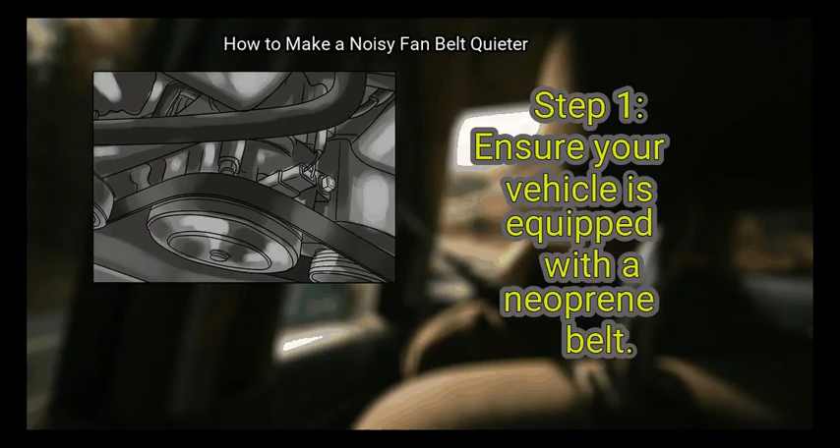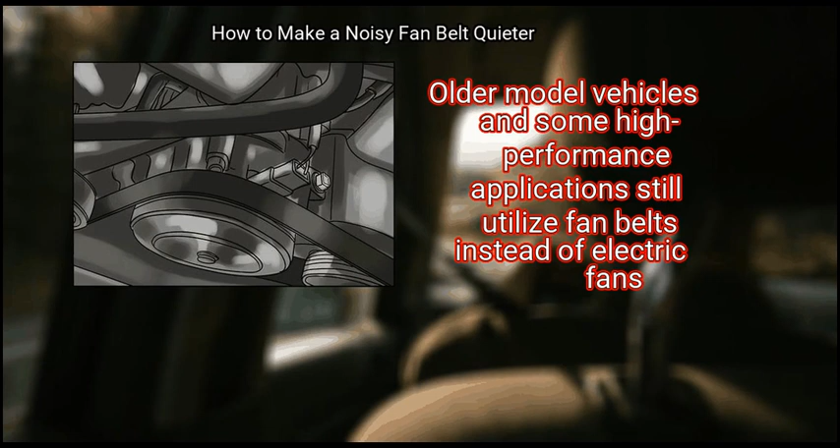Method 1. Applying belt dressing to neoprene belts. First, ensure your vehicle is equipped with a neoprene belt. Most modern vehicles have a serpentine belt instead of a fan belt. Though the names may be used interchangeably, older model vehicles and some high-performance applications still utilize fan belts instead of electric fans. Older belts were made of neoprene and would benefit from the application of belt dressing.

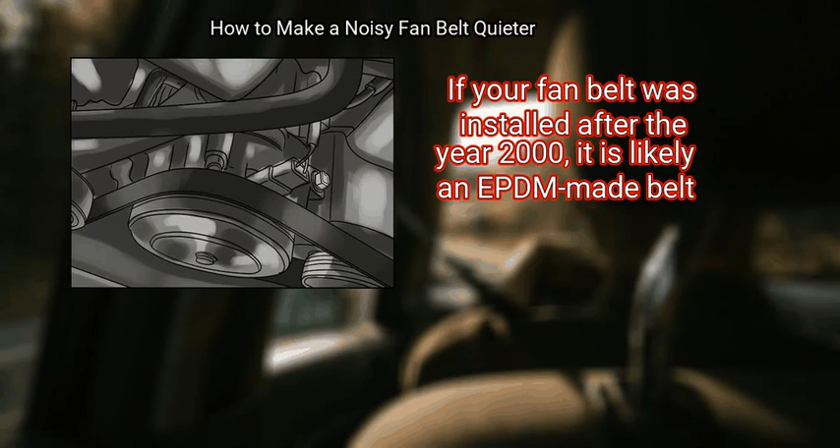But newer EPDM-made belts may dry out as a result of using belt dressing. If your fan belt was installed after the year 2000, it is likely an EPDM-made belt. The two belts are difficult to tell apart visually until they are worn out and need to be replaced.

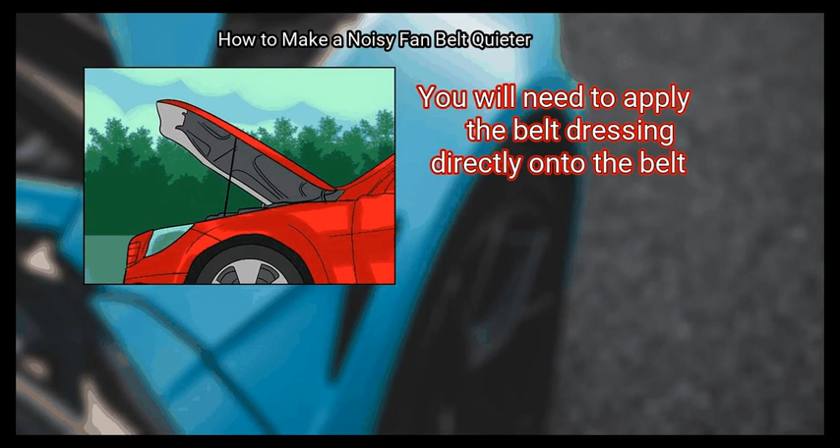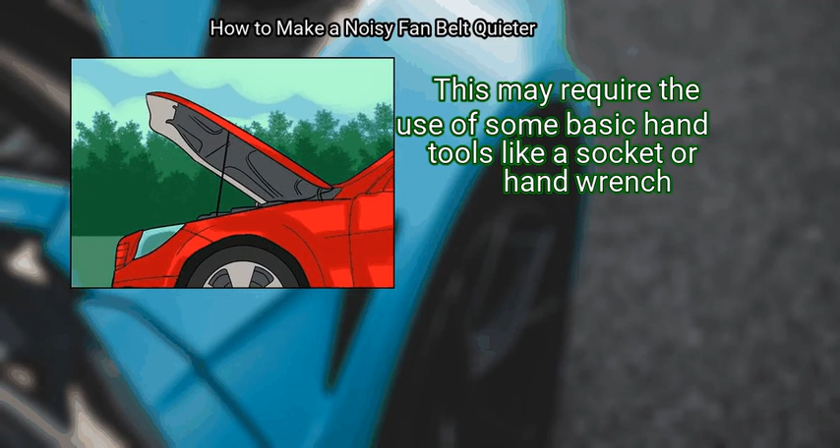Step 2. Open the hood. You will need to apply the belt dressing directly onto the belt. In order to do so, you will need to open the hood of the vehicle and remove any cowl cover that may be in place over the fan belt itself. This may require the use of some basic hand tools like a socket or hand wrench. Some vehicles have engine covers that will need to be removed. You will need a direct line of sight and access to the belt while the engine is running.

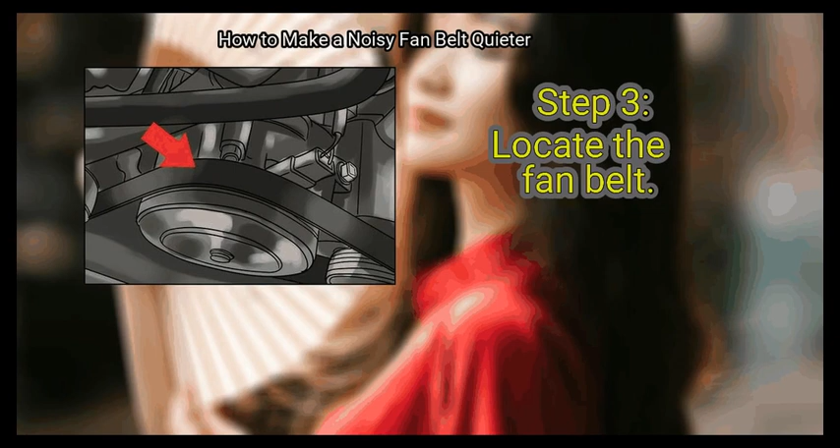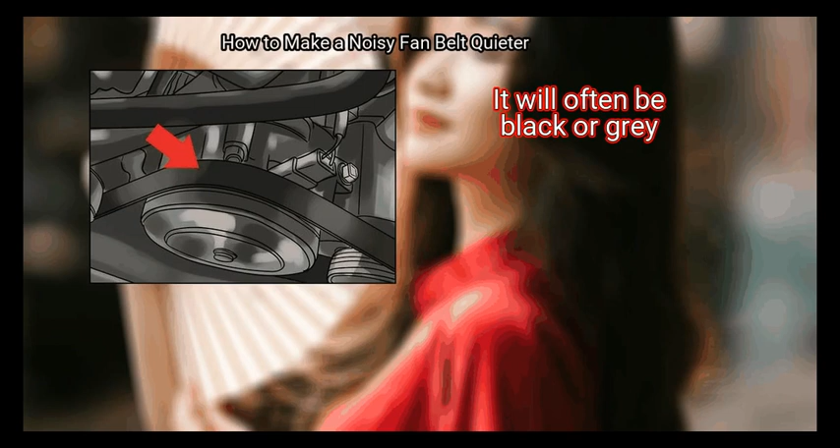Step 3. Locate the fan belt. The fan belt will likely be located at the front of the engine, attached to a pulley that rotates the cooling fan or fans for the radiator. It will often be black or gray. You may be able to locate it faster by starting at the radiator fan and working backward.

In many older American vehicles, the fan belt is connected to a shaft with a large metal fan at the end and is easy to identify. Serpentine or accessory belts that serve the same function as a fan belt may be on the side of a horizontally mounted engine.

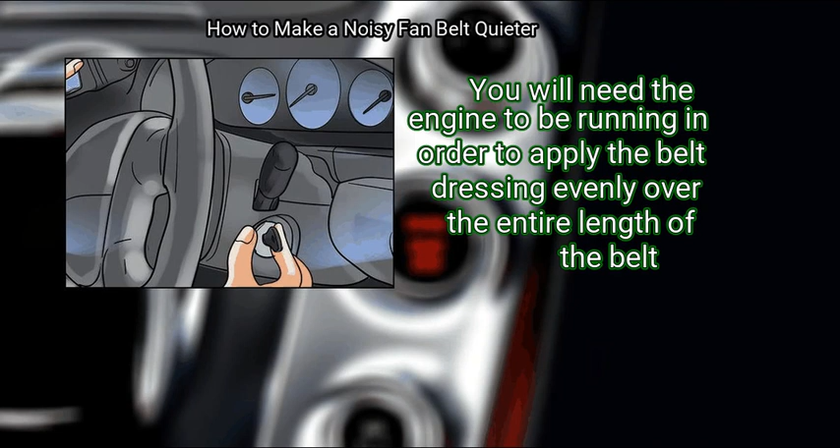Step 4. Start the vehicle. Ensure the vehicle is in park with the parking brake engaged, then start the engine. You will need the engine to be running in order to apply the belt dressing evenly over the entire length of the belt. Leave the hood open and engine covers removed when starting the engine.

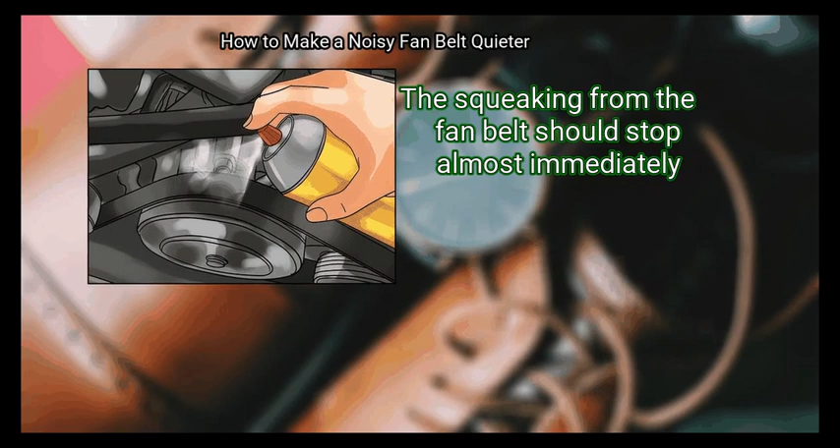Finally, spray the belt dressing directly onto the belt. With the engine running, spray the belt dressing directly onto the back of the fan belt. As the engine runs, the fan belt will be moving quickly, so you can leave the can in one place and spray onto the belt as it spins. Spray the belt dressing onto the belt until the entire belt is wet. The squeaking from the fan belt should stop almost immediately.

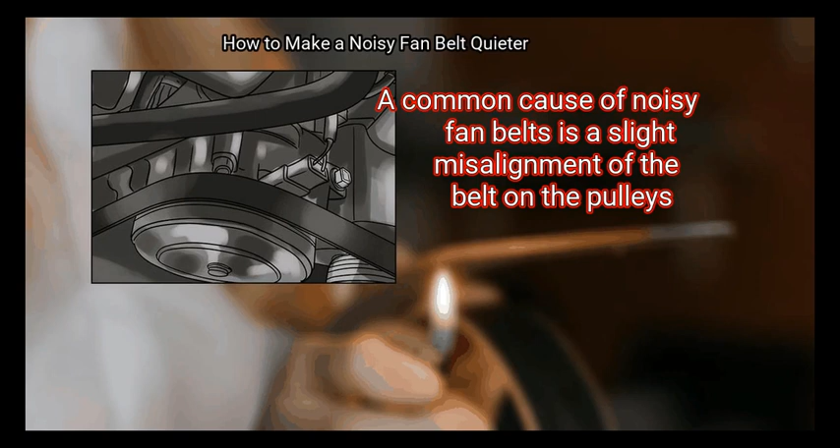Method 2. Tightening or aligning a fan belt. First, inspect the belt for misalignment. A common cause of noisy fan belts is a slight misalignment of the belt on the pulleys. With the hood open, examine the belt to ensure it is mounted on the topmost pulley completely straight.

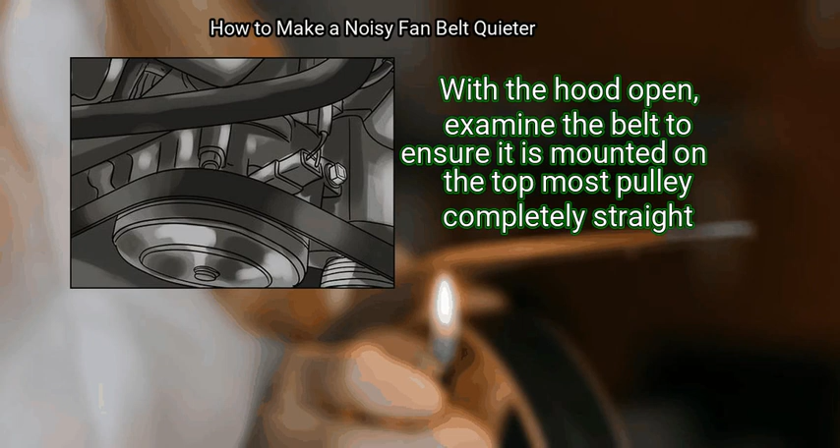If you are unsure, place a tape measure along the pulley to provide yourself with a frame of reference. If the belt is offset even slightly, it will cause squeaking, squealing or chirping. A belt that is not properly aligned will wear out faster.

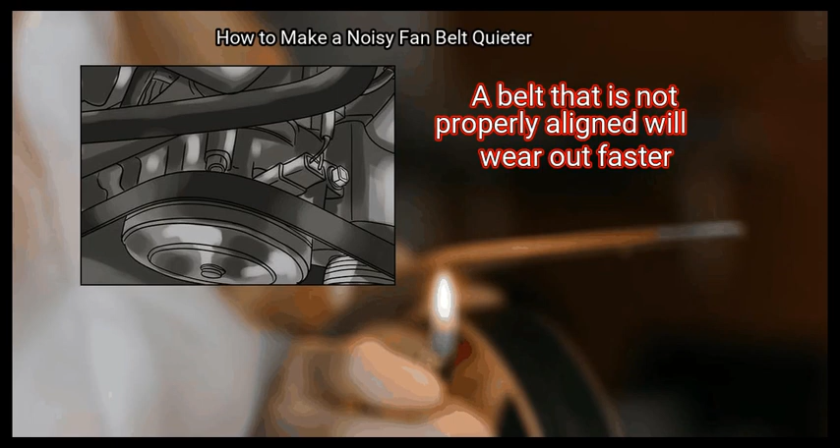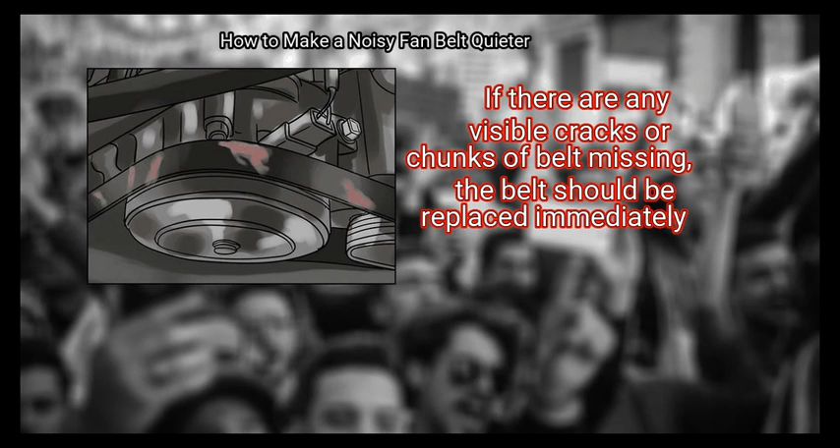Step 2. Identify signs of damage or excessive wear. If your belt needs to be replaced, it will often become noisy as a result of the wear or damage. Shine a light on the belt and look at it closely. If there are any visible cracks or chunks of belt missing, the belt should be replaced immediately.

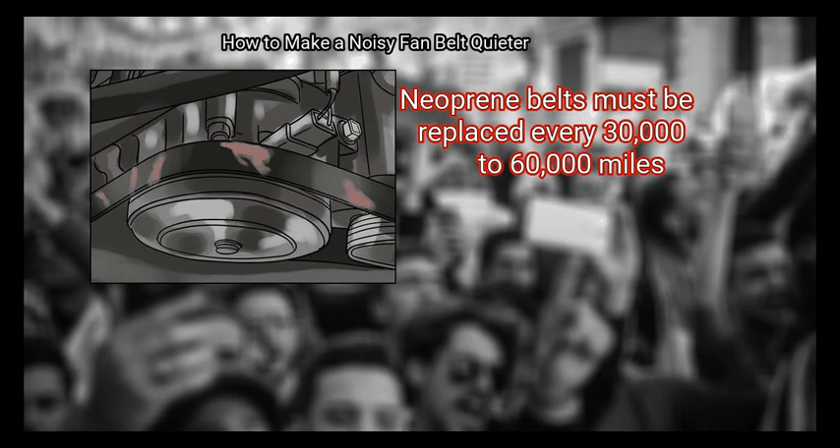Modern EPDM-made belts are designed to last up to 100,000 miles before being replaced but may wear prematurely due to misalignment or unusual driving conditions. Neoprene belts must be replaced every 30,000 to 60,000 miles.

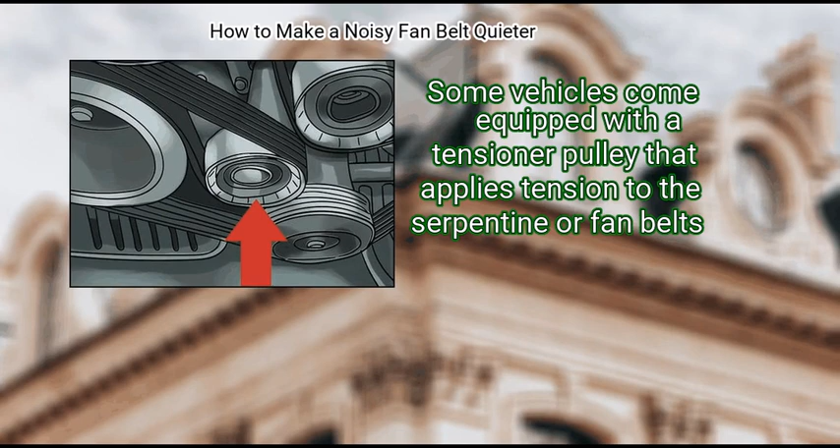Step 3. Locate the tensioner pulley. Some vehicles come equipped with a tensioner pulley that applies tension to the serpentine or fan belts. If you are unsure if your vehicle came equipped with a tensioner pulley, refer to the service manual for your specific year, make and model vehicle.

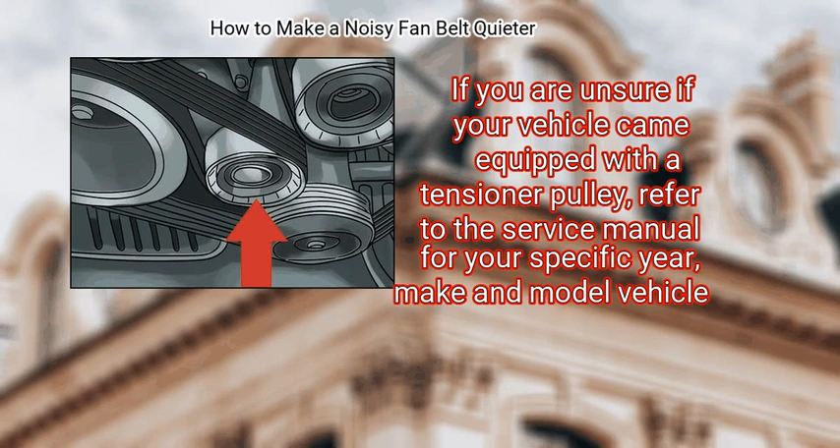The tensioner pulley is often bolted directly to the engine block and has an opening that will fit a 1/2 inch drive ratchet. Not all vehicles come equipped with a tensioner pulley.

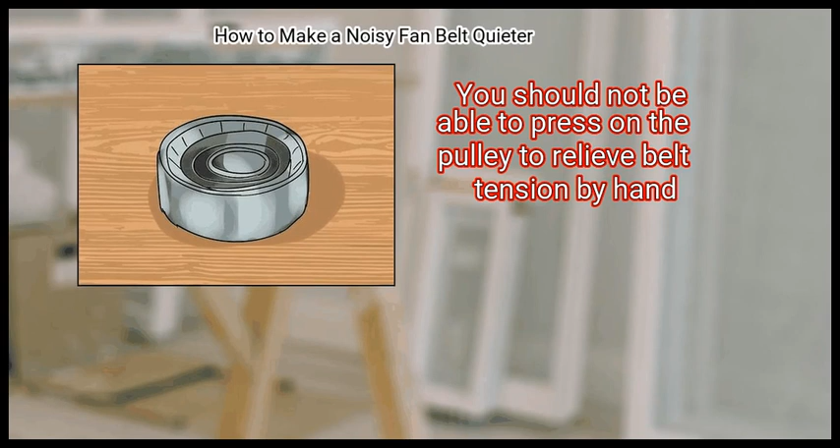Step 4. Replace the tensioner pulley. If the tensioner pulley, or auto tensioner, is too worn out to be able to apply sufficient tension to the belt, you will need to replace it. You should not be able to press on the pulley to relieve belt tension by hand. If you are able to, the tensioner must be replaced.

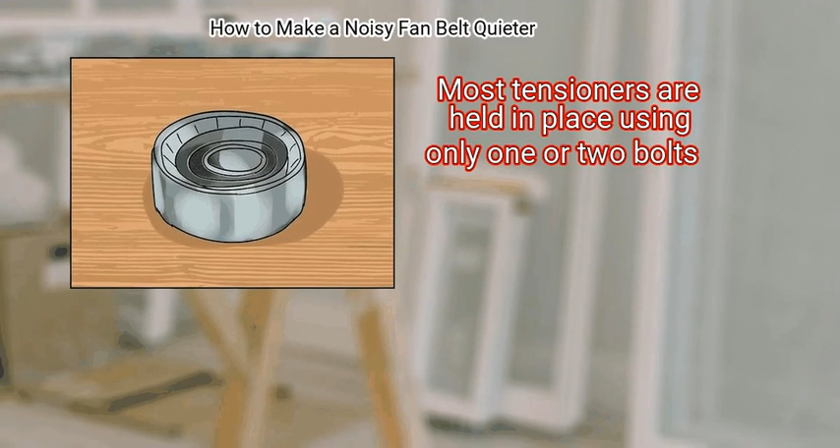Most tensioners are held in place using only 1 or 2 bolts. Remove the old tensioner by removing the bolts passing through it and into the engine block. You may want to replace the belt at the same time due to any damage that may have resulted from a loose tensioner. Finally, tighten the tensioner.

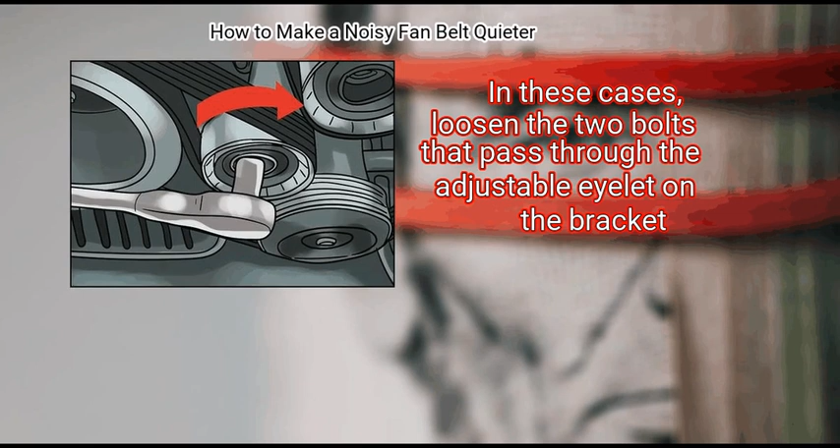In some vehicles, the belt tension is established by an adjustable bracket on an accessory such as the alternator. In these cases, loosen the 2 bolts that pass through the adjustable eyelet on the bracket. Slide a pry bar between the alternator and the engine block and pry the alternator away from the engine with the belt over the pulley.

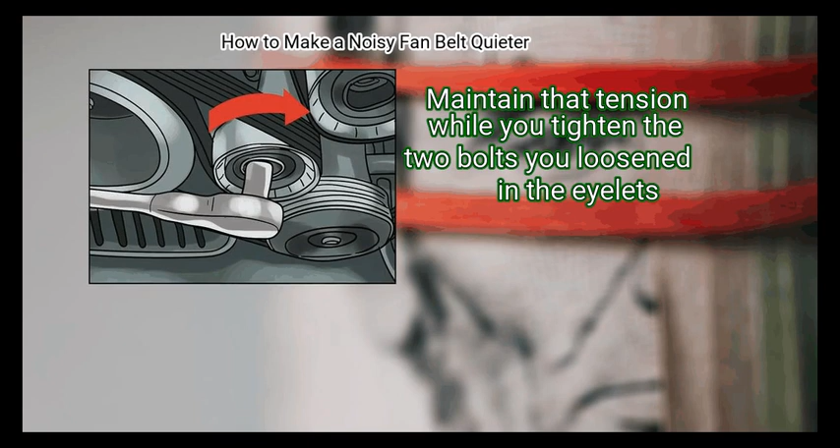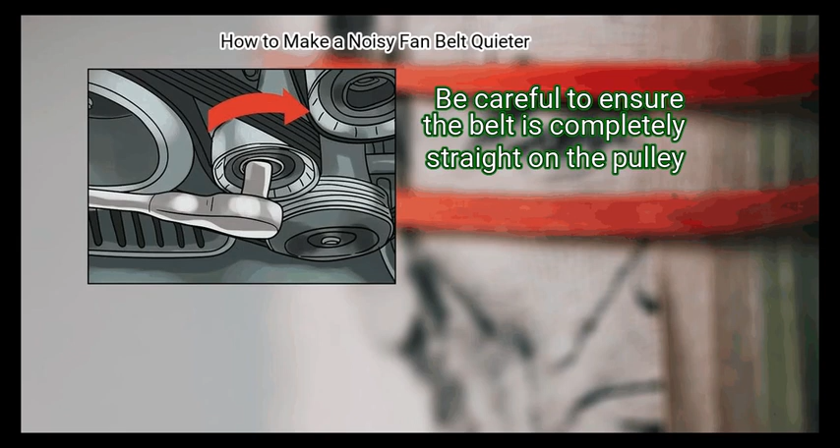Maintain the tension while you tighten the 2 bolts you loosened in the eyelets. This task may be easier to accomplish with a friend helping maintain the tension on the belt. Be careful to ensure the belt is completely straight on the pulley.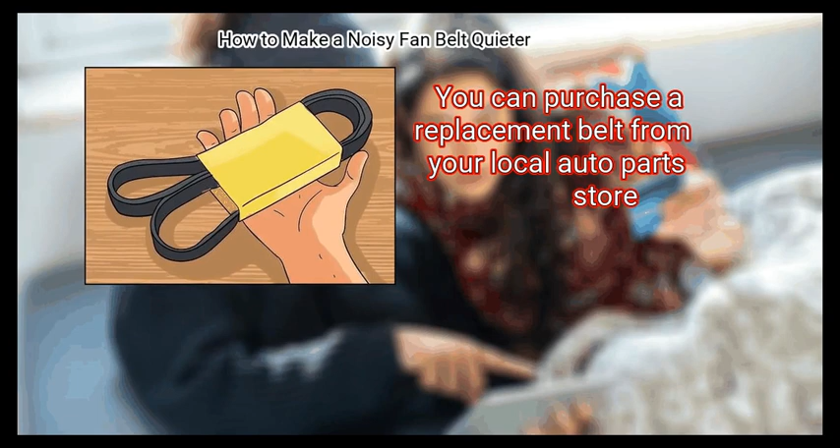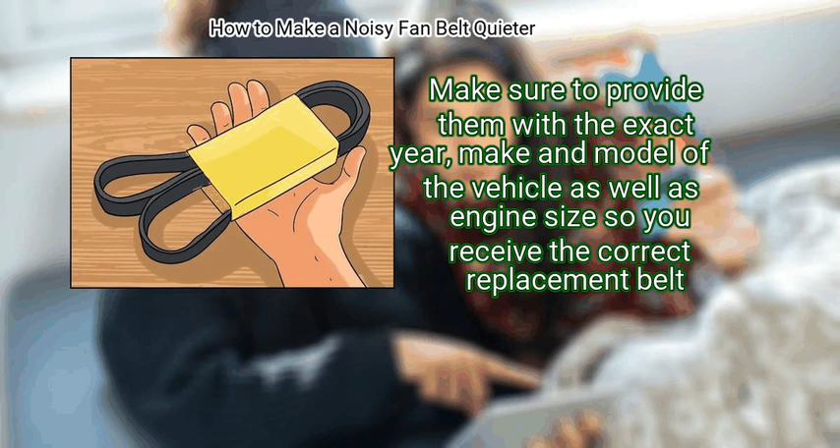Method 3. Replacing the belt. First, purchase a replacement belt. You can purchase a replacement belt from your local auto parts store. Make sure to provide them with the exact year, make and model of the vehicle as well as engine size so you receive the correct replacement belt. It is recommended that you use an EPDM style belt to replace your old one.

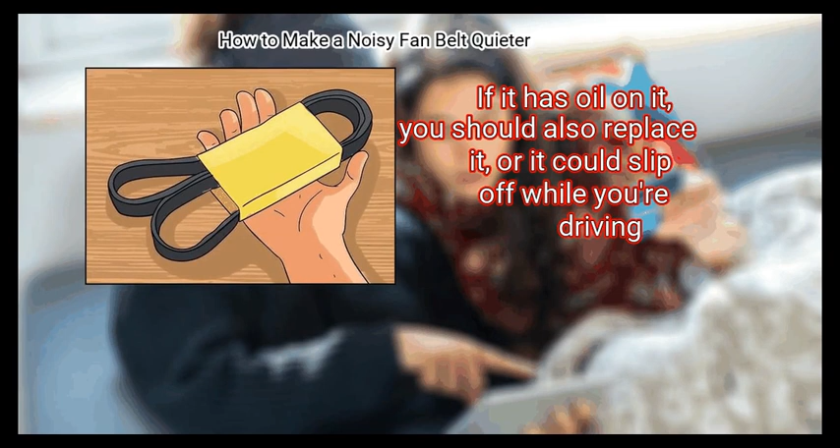Compare your new belt to the old one to ensure the new belt is the proper length and width. You'll need to replace the belt if it's worn or damaged. If it has oil on it, you should also replace it, or it could slip off while you are driving.

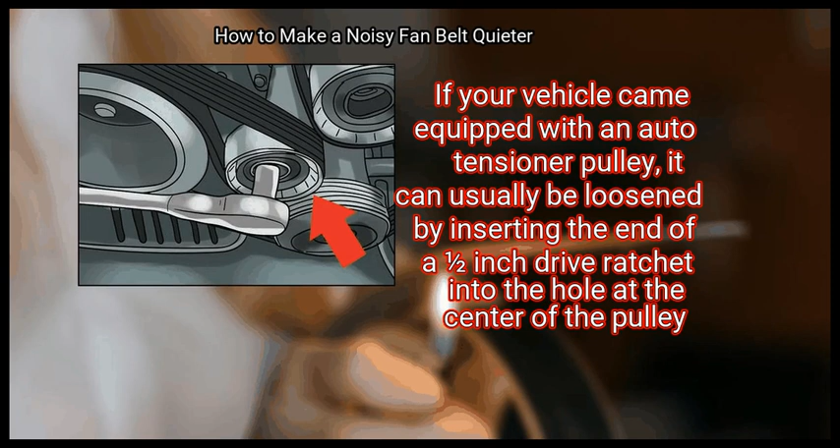Step 2. Relieve the tension on the belt. If your vehicle came equipped with an auto tensioner pulley, it can usually be loosened by inserting the end of a 1/2 inch drive ratchet into the hole at the center of the pulley. In some vehicles, it may be a bolt head you will need to locate the proper size wrench to turn. Twist the pulley clockwise to bend the tensioner arm down and remove the tension from the belt.

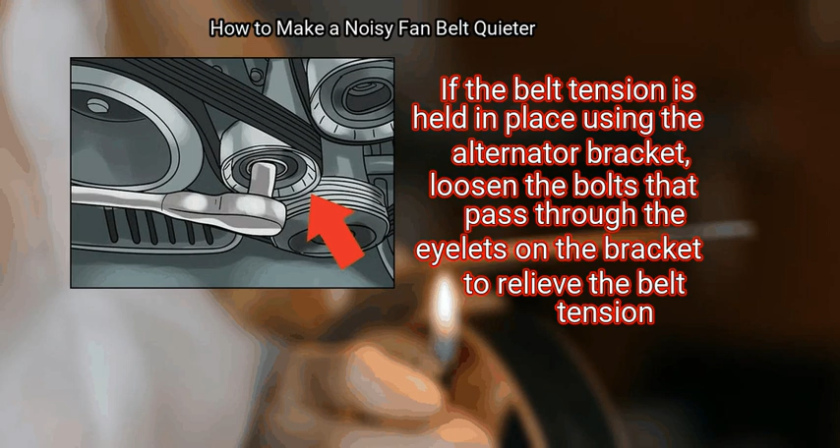If the belt tension is held in place using the alternator bracket, loosen the bolts that pass through the eyelets on the bracket to relieve the belt tension.

Step 3. Remove the belt from the engine. Make note of how the belt is run through the engine. If it is strictly for use on the fan, it will have very few twists and turns. But if it is a more modern serpentine belt design, it may need to pass through and around a number of pulleys. Your vehicle's service or owner's manuals should provide a diagram on how the belt is to be run. But you still may want to get a good look at it before removing it.

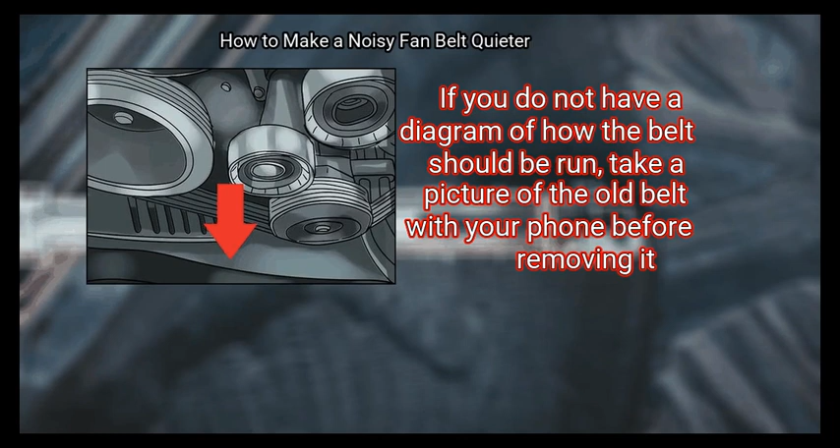If you do not have a diagram of how the belt should be run, take a picture of the old belt with your phone before removing it. Step 4. Install the new belt. Run the new belt through the pulleys in the same way the previous one was. Be sure the belt fits onto each pulley evenly and in a completely straight line to avoid damaging the belt and making lots of noise.

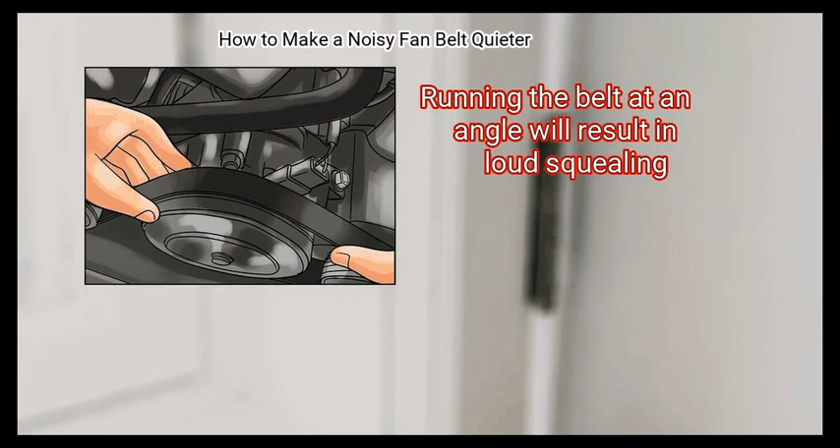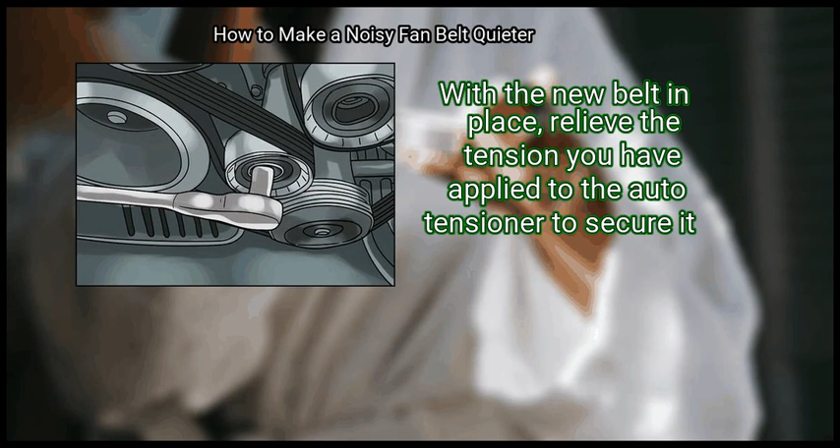Refer to the owner's or service manual for your specific vehicle to be sure you've run the fan or serpentine belt correctly. Running the belt at an angle will result in loud squealing. Be sure it is mounted flat and evenly. Finally, apply tension to the belt. With the new belt in place, relieve the tension you have applied to the auto tensioner to secure it.

In vehicles equipped with a bracket to apply tension, insert a pry bar between the bracket and the block and pry it away from the engine. Tighten the eyelet bolts with tension applied. Visually inspect the new belt to ensure it is straight. Start the vehicle to check for squealing.